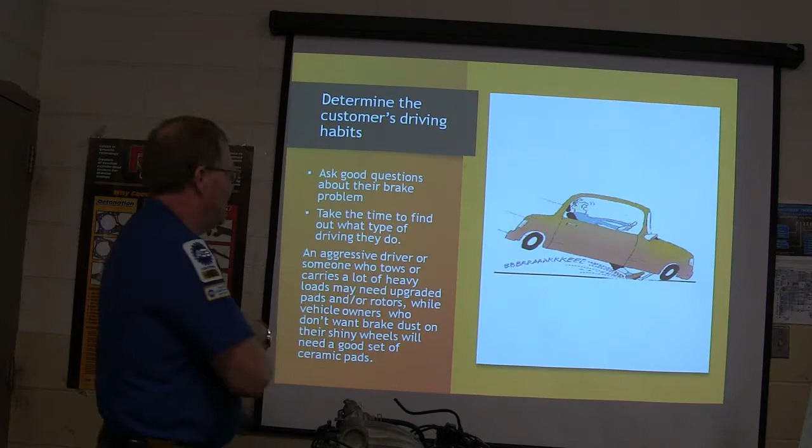All right, so the first thing we're gonna do when we're starting on brakes is we gotta determine what the customer's driving habits are, right? So basically, we're gonna take time to find out what kind of driving they do. If somebody's really an aggressive driver, if they tow heavy stuff, or if they haul heavy stuff, they're gonna basically need a higher quality brake pad and rotor.

You know the rotors that we were putting on the other day that were really nice and vented, and more higher quality than regular rotors? You're basically wanting stuff that runs cooler for the most part. If somebody doesn't want brake dust on their shiny wheels, they may want a really nice set of ceramic brake pads. You know what I mean? So that's the deal on that.

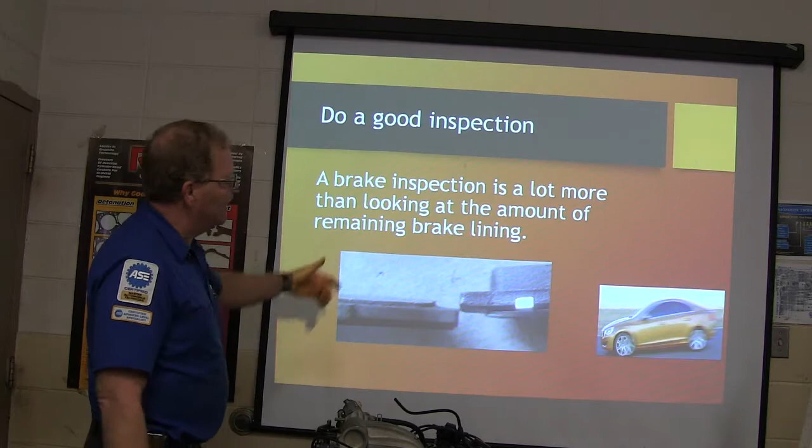All right, so brake inspection is a lot more than looking at the amount of brake lining. A lot of times we feel like if we've looked with our flashlight, oh, the brakes look okay. There's more to it than that. And so we're gonna do a good inspection, unless the brakes are totally shot and they're grinding the rotors away. Sometimes when it comes in, they're just gone, and that's basically what you're going after. May not be all that needs fixing on it, but that's what you're going after.

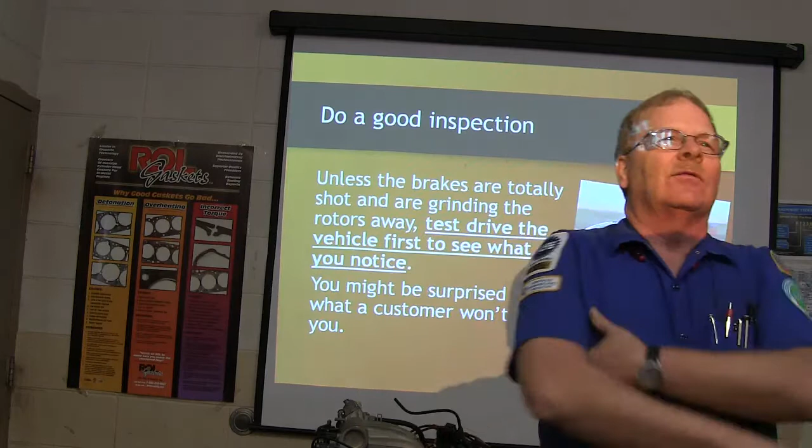But for example, Gene is talking about his truck, he says he's feeling it on his rotors, and he's basically getting his rotors machined in the next couple, 3 days. For example, my son was working out there with Mike, and they had this Jeep that came in that had 4-wheel disc brakes on it, and they machined the rotors because of brake pulsation.

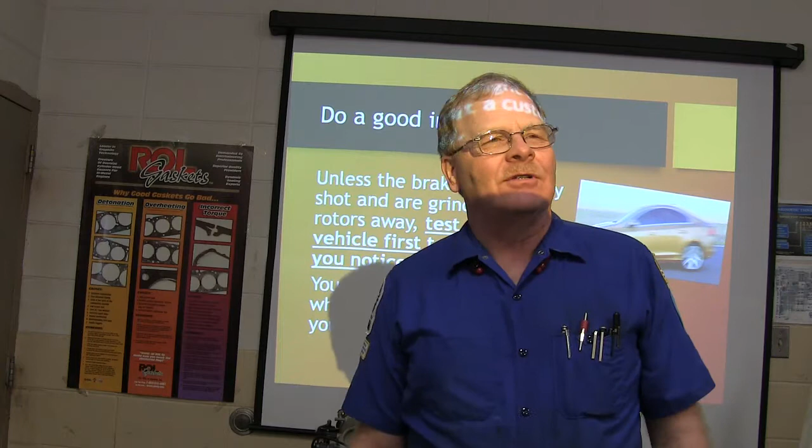And Matt drove it again after they machined the rotors and put them back on there. He goes, this thing's still pulsating just like it was. Mike looks at the clock and says, yeah, she'll be here in about 45 minutes, and here we are with our pants down around our ankles, you know. Well, they had to pull the rear rotors off and machine them. You kind of get to where you can feel the difference between the rear brakes pulsating and the front brakes pulsating.

Now, if you're driving one that's got drum brakes on the rear, you can actually apply the park brake gently, release the park brake and apply the park brake, and see if you're feeling it on the rear, and that way you'll know if you got drum issues. Now, you can't do that on the ones where the park brake's in the hat, or if it's done a different way.

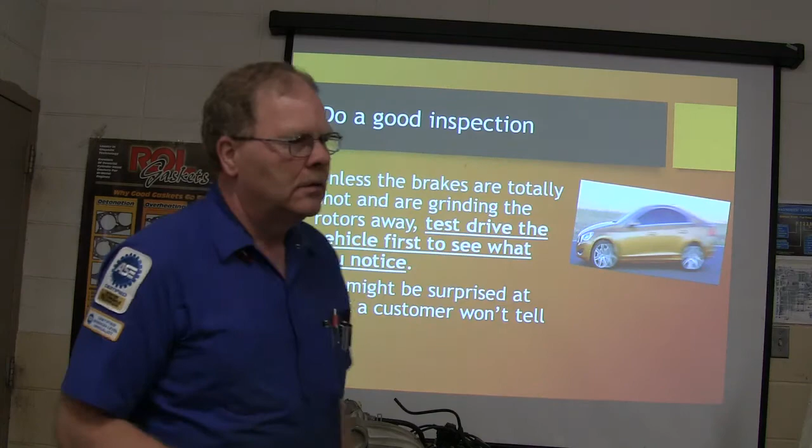Do you do that here? What's that? Shave the rotors down or whatever? Yeah, we do that. We machine rotors and all, we got all the machinery for that.

So, you might be surprised what a customer won't tell you. A lot of times they'll just throw you the keys and say, fix my car. They won't give you the least amount of information. Now, does the park brake work? That's something we want to know about. Sometimes they'll have rusted cables, sometimes they're maladjusted, sometimes there's something else.

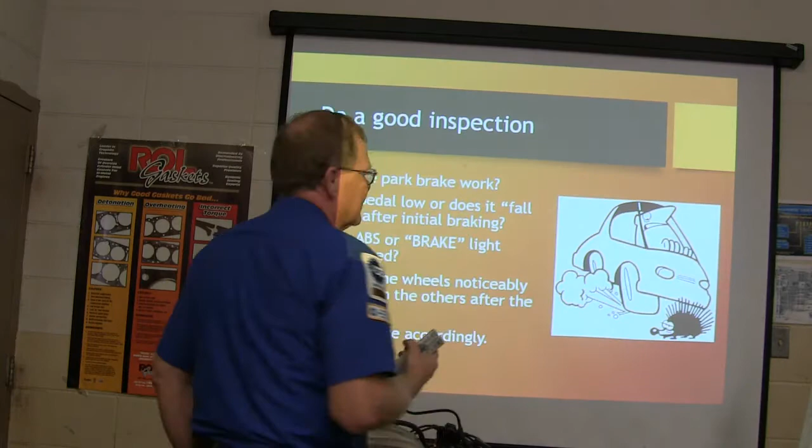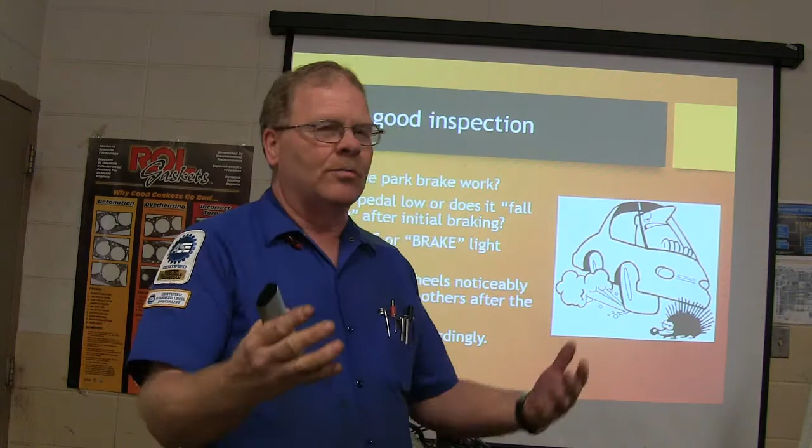And a lot of times on these Chevy pickup trucks that have those park brakes in the hat, not only are you going to put disc pads and rotors on the rear, but you're going to change the park brakes back there too. When you pull the rotor off, you'll see them. They're in the hat of the rotor. And we change those a lot of times because they're usually worn out.

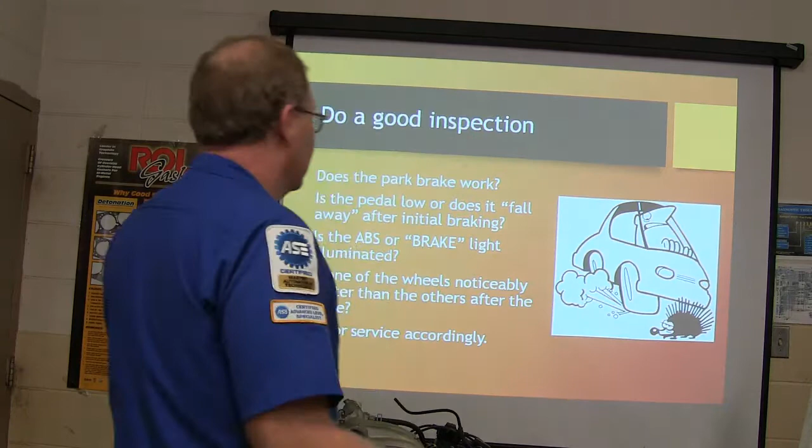Is the ABS or red brake light illuminated? Something else you need to pay attention to. Don't just assume that whenever you get your work done that all this is going to go away. You need to be thinking about it and keep it in mind while you're working on it. Is one of the wheels noticeably hotter than the other ones after a test drive?

Occasionally, have you ever had that? You're going to see it where one wheel is really, really hot and the brakes aren't feeling right. What was it on yours? It was on an F-250, and the other wheel that it was connected to, one was pushing harder than the other one. Yeah, you basically have caliper issues is what it amounts to. Tailor your service accordingly. All right.

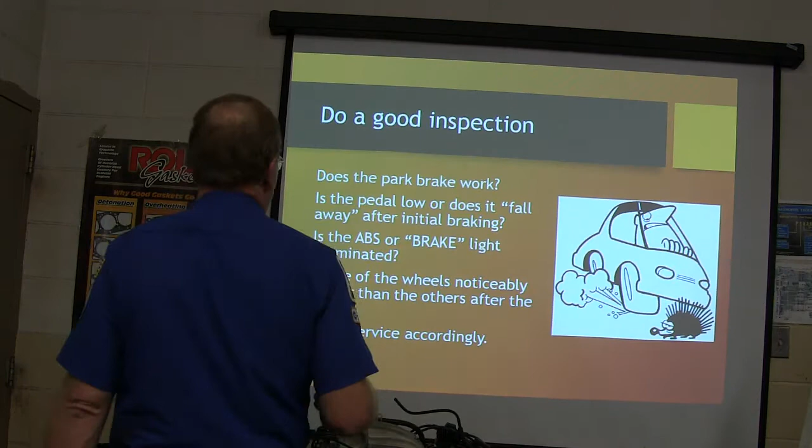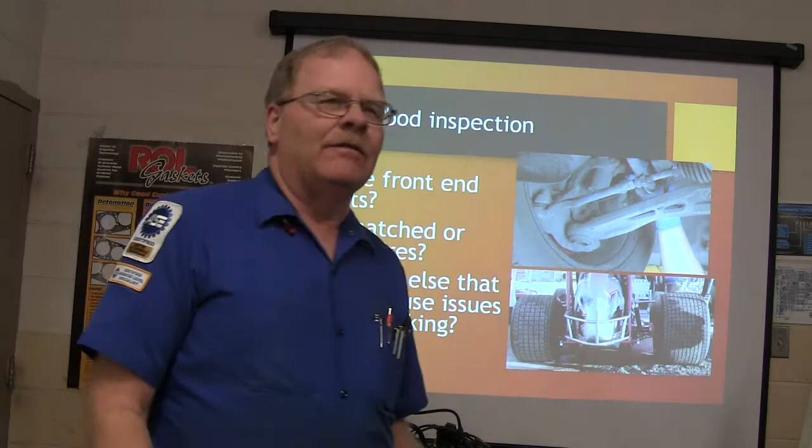So if you've got loose front end parts, mismatched or worn tires, anything else that might cause a braking issue. If you've got two different size tires, one tire that's low on air, this kind of thing, or if you've got strange wear on there. Now look at the brakes on all 4 wheels. Notice the brake lines. Are they badly rusted, or are they routed through deep wet mud inside the frame rails?

You know, those Volkswagen Rabbits used to have the brake lines running under the carpet, and there was a recall on those things. When I was at a Volkswagen dealership back in 1983, we'd have to pull the carpet back and see if those things were rusty enough to where they needed to be replaced. Because they were concerned about it, and I actually had one of those that the brake line ruptured on because of going under the carpet.

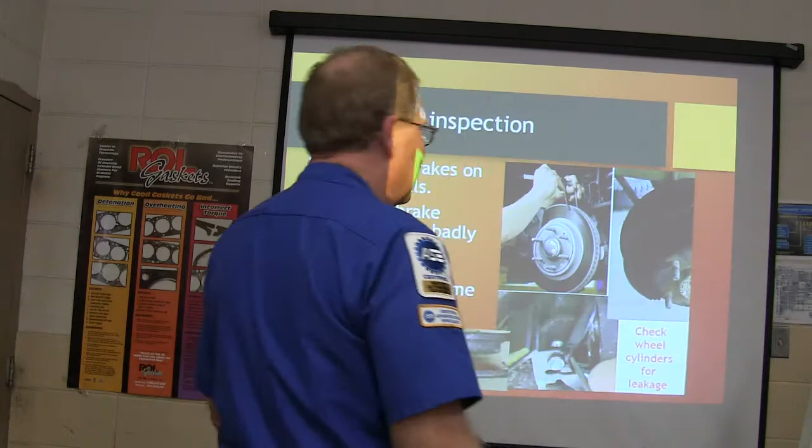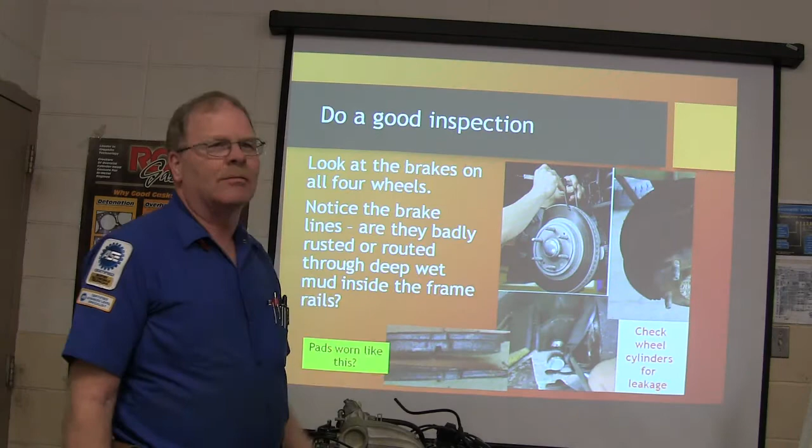All of a sudden you hear something and your carpet's getting wet with brake fluid and you can't stop, and you gotta be like a gunslinger on that park brake. Slide the wheel. Especially if there's a big truck coming and you're about to go out in front of it. Check your wheel cylinders to make sure that they're not leaking. If your pads are worn like that, that's a clue that there may be something more to it than just slamming a set of pads on it.

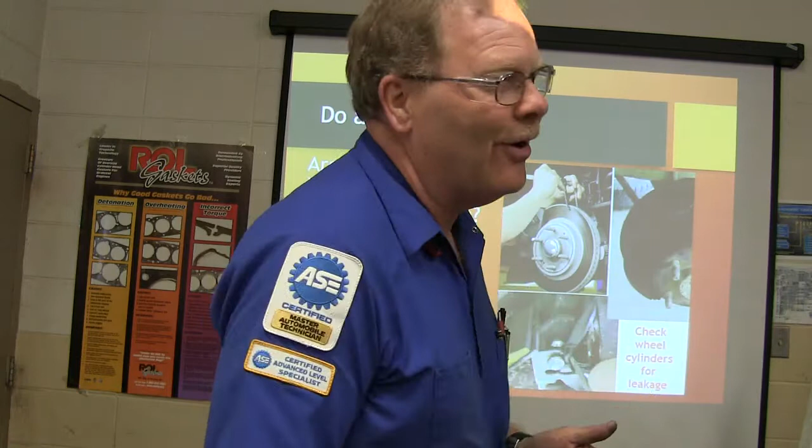How many of you guys have slammed a set of pads on there without even machining the rotors or replacing the rotors? Just throw pads at it. You know what I mean? That's not a mechanic's way of doing that unless he may be working on his own car. There's a right way to do stuff, there's a wrong way to do it. Are the rubber brake hoses leaking or swollen? Is it low on fluid? And are there leaks you can see anywhere?

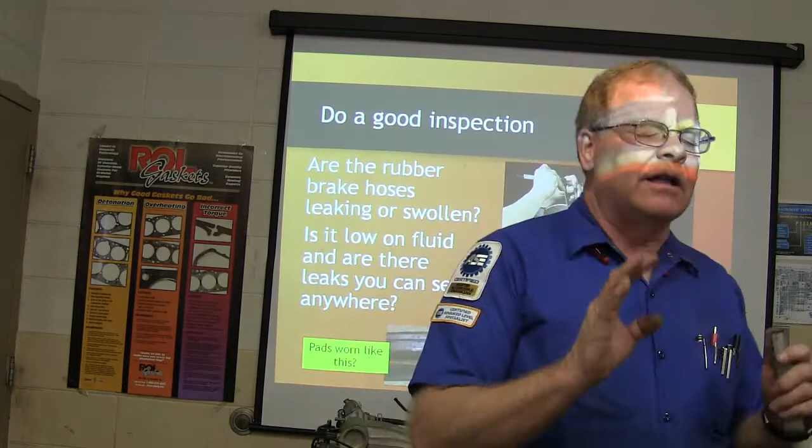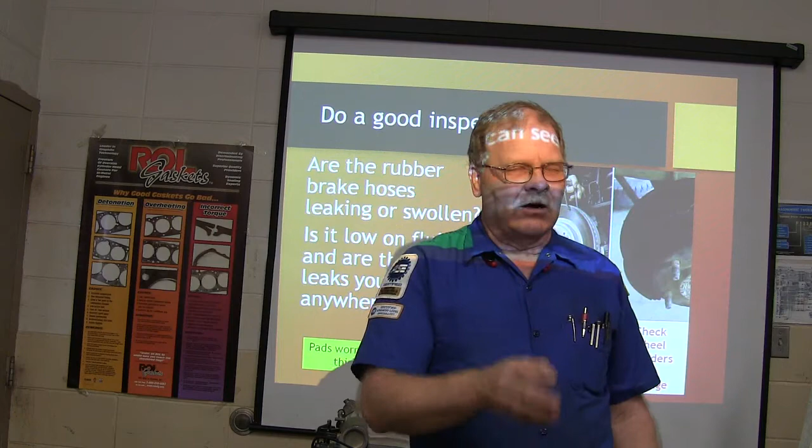Now I'm going to give you a little qualification here. Even if there's nothing wrong with the master cylinder, you may see a little bit of leakage down on the booster, right where the master cylinder goes to the booster. Not a lot. I'm not talking about a whole bunch. Something else that can happen is brake fluid can go inside the booster. We'll talk about that another time.

All right, so some people will look at the rotors. I've seen some people rub their finger across the rotor and act like that's telling them what needs doing to the brakes. Well, you can't really tell what's going on just feeling the rotors without looking at the pad lining and other things, because there's sand and rocks and all kinds of stuff that gets picked up and trapped between the rotor and the brake pad, and it's not going to be a beautiful, smooth thing all the time. That's just all there is to it.

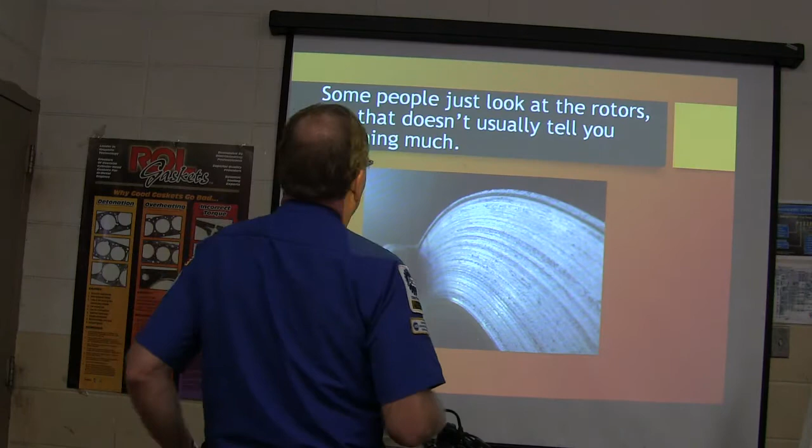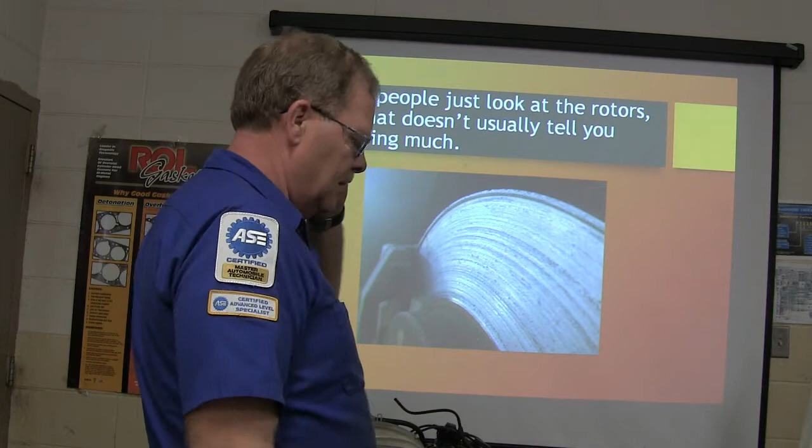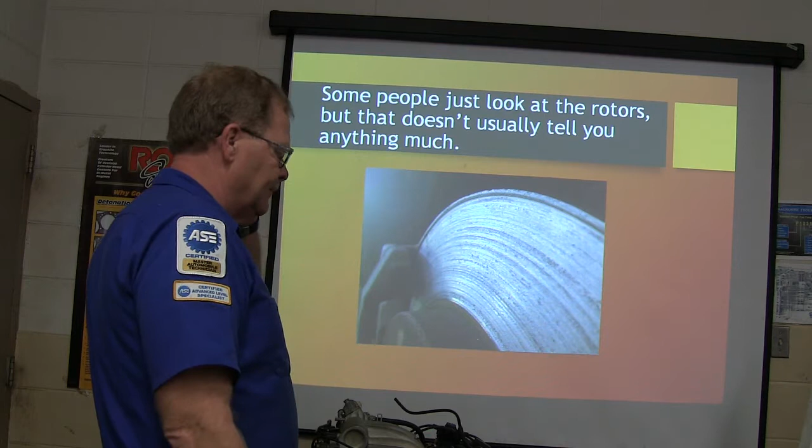I told you that phone was going to ring. Anytime I'm doing this, it's going to ring. This is Richard. Yes, ma'am? Yeah. Uh-huh. Well, come see me and I'll help you out. Thank you, ma'am. She'll be knocking on the door in a minute. She's got a screw missing out of the manifold in a Crown Victoria, okay? Whoever that is, I don't know. Did you leave the screw out of the manifold? No, I don't think we worked on this one.

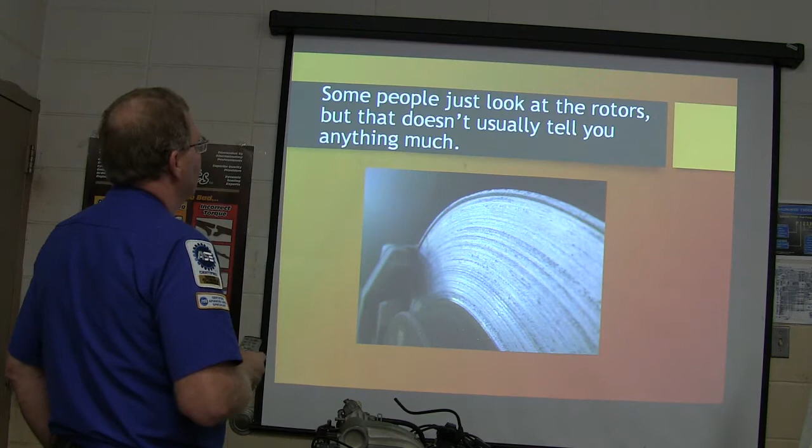All right, so, some people just look at the rotor, there we go. Come on, there we go. Do a good inspection. Watch this video. Let's see if I can make this video play.

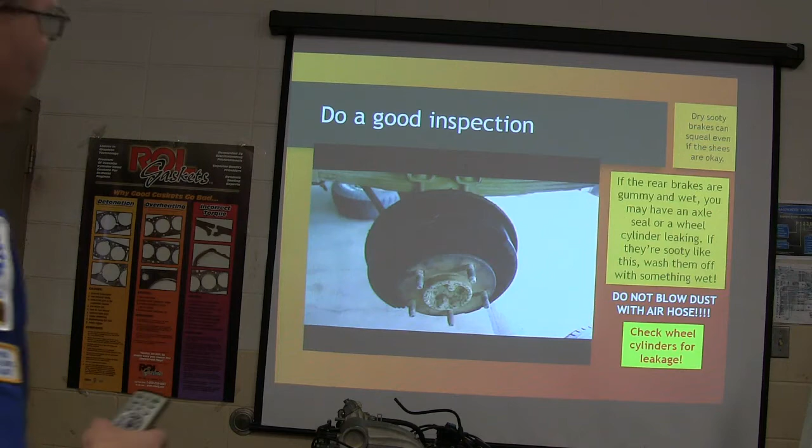Now, well, no, I'm not thinking, well, is this a video or is it not a video? I got a video, I may have just a picture here in a minute.

If the rear brakes are gummy and wet, you might have an axle seal or a wheel cylinder leaking, okay? If they're sooty like this, wash them off with something wet. Don't blow the dust with an air hose. It's bad. It's bad news. Check wheel cylinders for leakage always. Now, I'll show you in a minute how you do that.

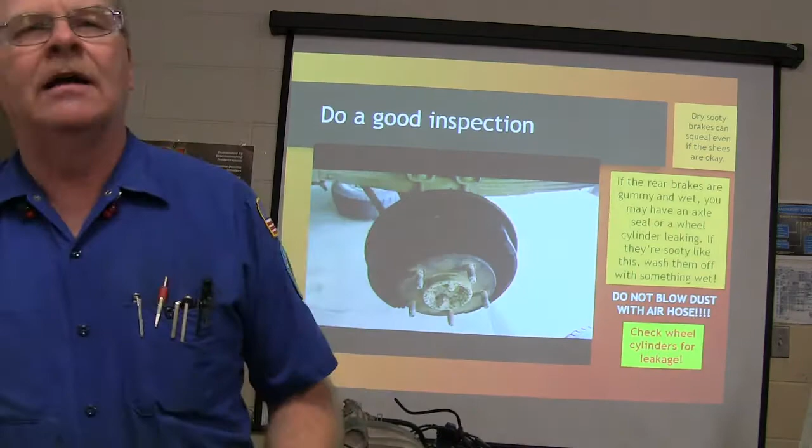Dry sooty brakes can squeal even if the shoes are okay. Now, if somebody's talking about the rear brake squealing and there's dust in the drums, then you may need to wash it out with some brake parts cleaner, 409, water, anything you can do that's wet that keeps that dust from flying up and going up your nose. That's basically what you're after.

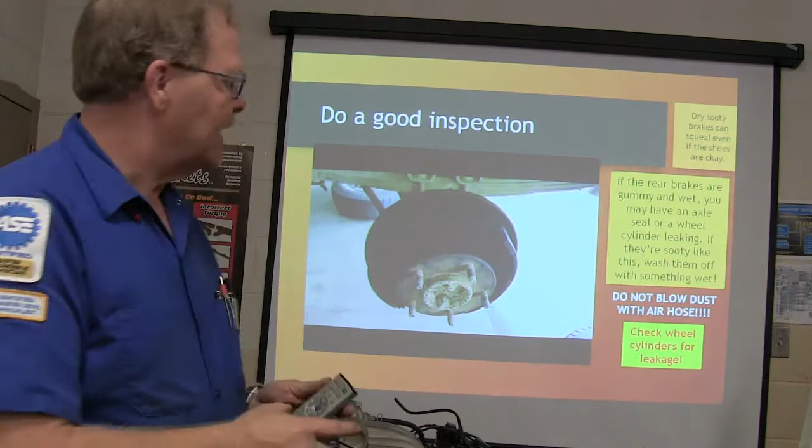Let's see what happens here. Right, now, what I wanted to show you on there, that video didn't play because I went from one computer to a different one. Sometimes that happens.

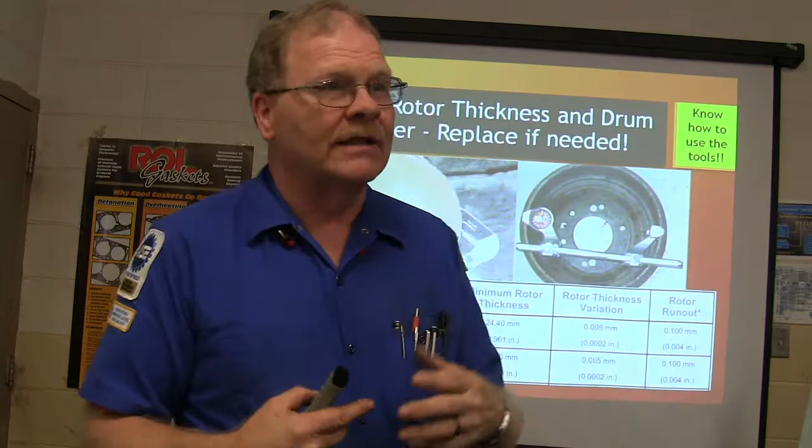Take that little boot. You know where your wheel cylinder is? Pull that little boot back and see if there's fluid in there. If there's fluid in there, you're going to need to redo those wheel cylinders. Got it? Or replace them. We used to do them all the time. I mean, we would actually rebuild a wheel cylinder.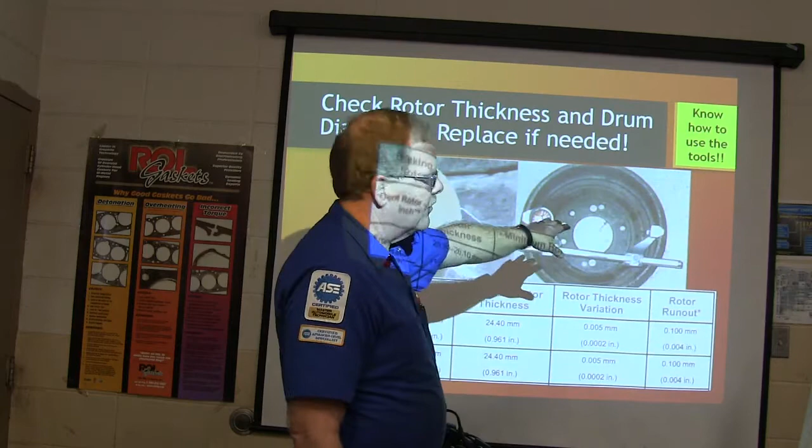Check the rotor thickness and the drum diameter, replace if needed. Know how to use the tools. If you can't read the tools, then you're handicapped. You need to know how to read a mic. You need to know how to read a drum micrometer. If you don't know how to do all that, there will be a final exam at the end, and you're going to have to do some of this stuff.

If you have not been here all the time, or missed those worksheets, or didn't turn them in, or didn't take it seriously, like I've seen all these people do all the time, they drift over here and I'll say, hey, what are you doing? Oh, I'm helping him. And then whenever I turn around, they go back to standing around shooting the bull, just watching somebody work. Well, they ain't really learning nothing, you know what I mean? Anyway, you got to make sure that you know how to do all this stuff.

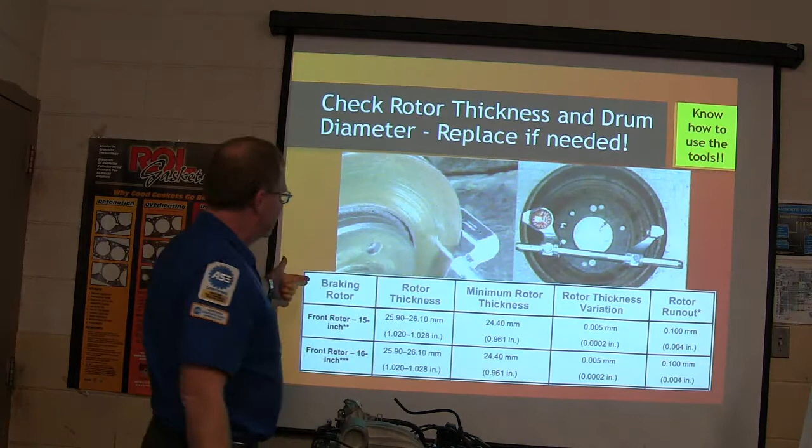This is where you're looking up and you see what your minimum rotor thickness variation means. If it's thicker and thinner, you got to measure like 8 different places with your micrometer, and your rotor runout is basically how much of this you're gonna have, right? That's that little runout that they're talking about there.

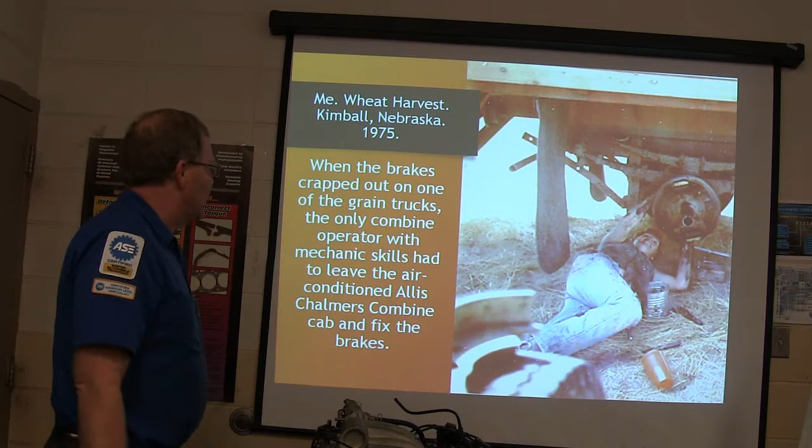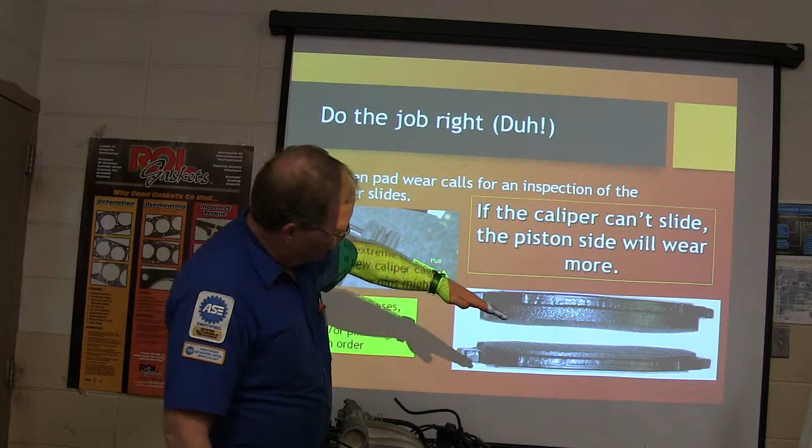All right, now, do the job right. Uneven pad wear calls for an inspection of the caliper slides. If you've got some that are either worn crooked like a wedge, or if the one next to the piston is worn more than the one on the other side, it means the caliper's not sliding like it should. And that's when you're supposed to do these.

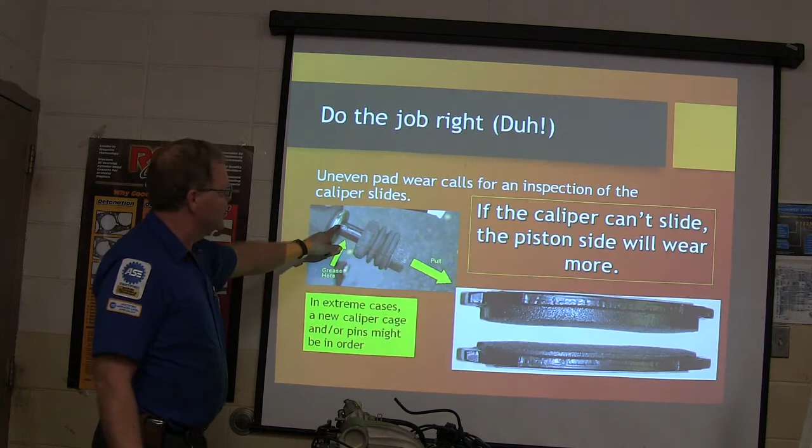Now you can get these little kits that will come with that boot. If that boot's busted, chances are this is gonna have a bunch of water up in it, it's gonna be stuck, and you're gonna have to fix that. And in some cases, you may have to replace the caliper cage. But the caliper cage doesn't always come with the dadgum slides. You got me?

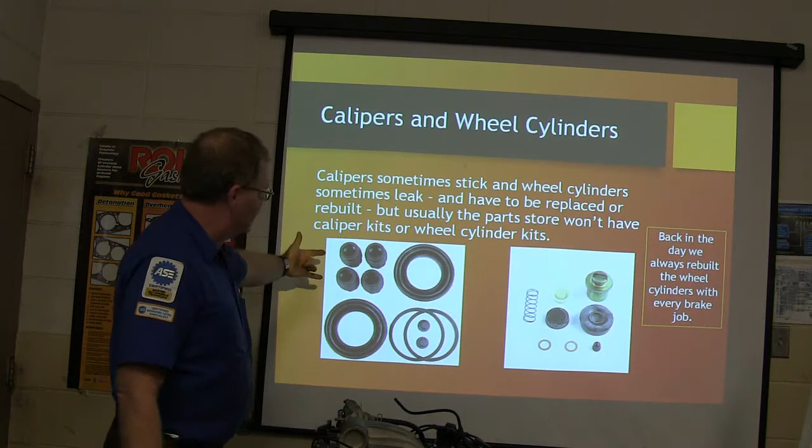Now then, calipers and wheel cylinders, you can do the kit. We always rebuilt the wheel cylinders on our brake job back in the 70s, okay? So the caliper kit a lot of times will come with these little boots here, and they'll come with those seals. There is a caliper out there that everybody's supposed to tear apart and put back together.

I think you've already done that, haven't you? Didn't you and Elijah do that? But, I done so much stuff. Yeah, I've been dumping it all on you, haven't I?

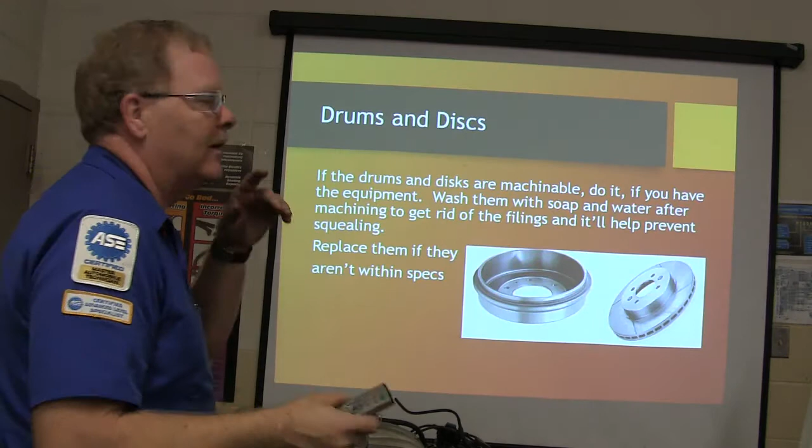If the drums and discs are machinable, do it if you have the equipment. If they're not machinable, then you need to replace them.

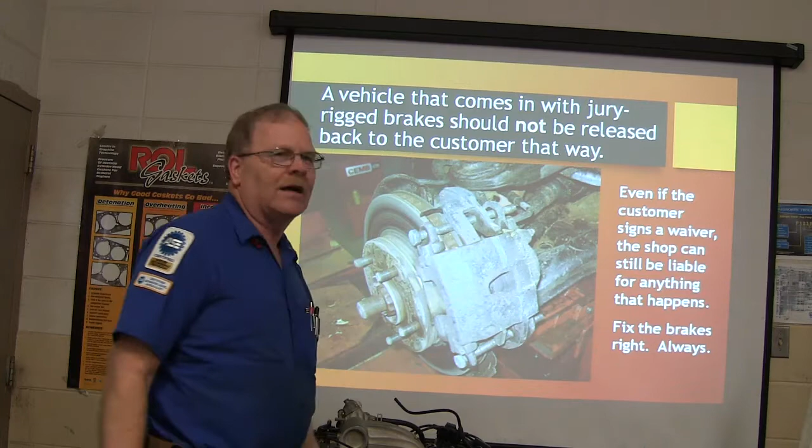If one comes in here all haywired up and barely holding together and you let it out of there like that, then you're basically now the last person that had it apart, and if it crashes, it's on the shop or you. You got me? It's better to disable the vehicle and make them come get it with a wrecker than it is to put it back together with the brakes not working right. You know what I mean? That's just all there is to it.

And a lot of times they say, well, I don't want you working on my truck if you're wanting to put all that stuff on there. You put it back together and I'll drive it out of there. No, you won't either. I'll put it back together and I'll fix it where somebody's got to come get it. Even if you have to pull the fuel pump relay or something. Fix it where they can't drive it if it's got stupid looking stuff like that. Always fix the brakes right. So you can refuse to do that? Yeah, they tell you can.

If the car is in your shop... there was this one I heard about a long time ago, a little old lady came in there. She didn't want them to fix her brakes because she didn't like the price, and they said your brakes are dangerous, you're liable to crash. And she says, well, I don't care, I'm not letting y'all fix the brakes. And so they made her sign a waiver. She drove away and she crashed and she sued the shop. You see where I'm going with that? So you don't go there.

How can she sue him if she signed a waiver? Because she signs the waiver and the judge says it doesn't matter if she signed a waiver. You knew that car wasn't safe and you let her take it. That's how that works. You see what I'm saying? I told her this, she said she didn't want to do it, so that's her fault. Well, then he says, doesn't matter. You owe her $2,500. Pay her up right now or go to jail. I ain't kidding you.

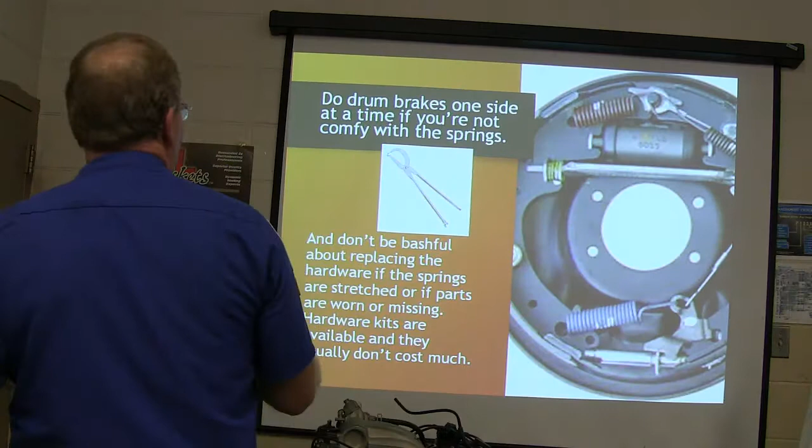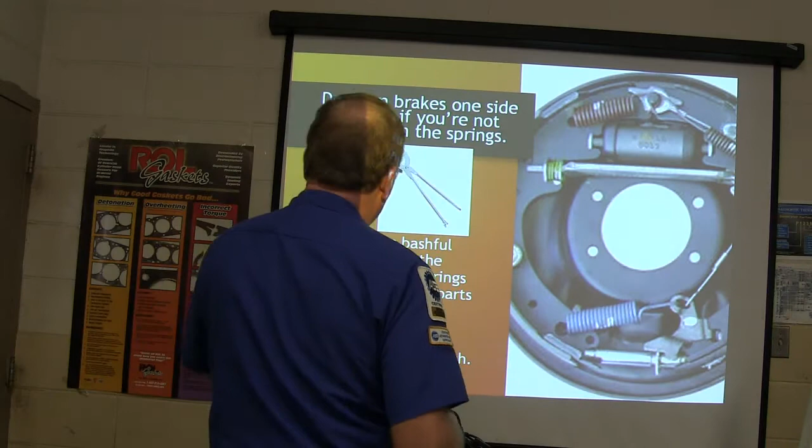Do drum brakes one side at a time if you're not comfy with the springs. Okay? Don't be bashful about replacing the hardware if the springs are stretched or parts are worn or missing. Sometimes you'll take brakes apart, and some yo-yo did the brakes and didn't know how to put some part back on there, and he just throws it aside and puts it back together without it. See what I'm saying? That's what happens sometimes. Or if everything is super rusty and the springs are weak, just get a hardware kit and build it up right. That's a good way to do it.

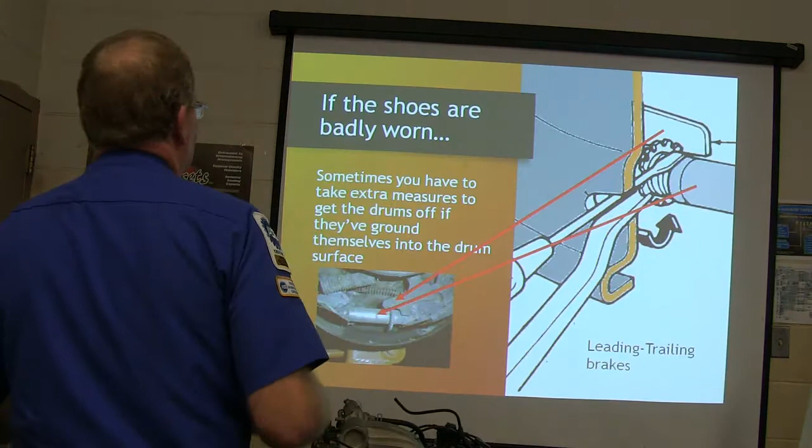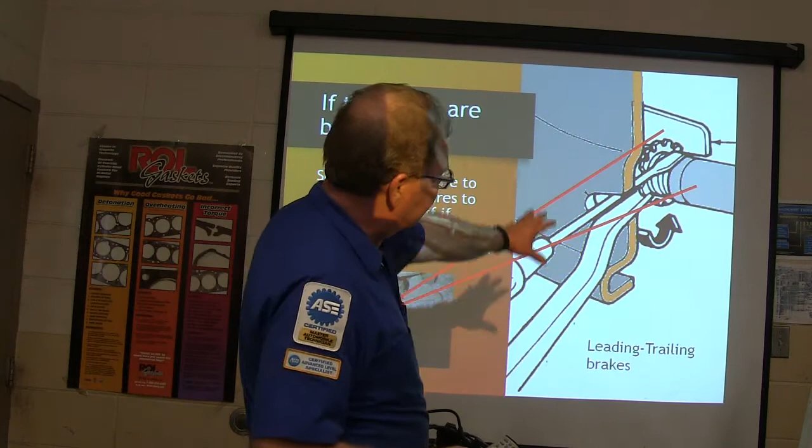Now, if the shoes are really badly worn, sometimes they'll be dug into the drum and you can't get the drum off. So you've got to figure out, well, this one right here is just conventional leading trailing brakes. You've got to get your screwdriver, push in there, push that adjuster away from that wheel, use your brake spoon, and loosen the drums. Don't get confused about which way it goes, or you're going to make them tighter than they already were. But anyway, that's something you're going to have to deal with.

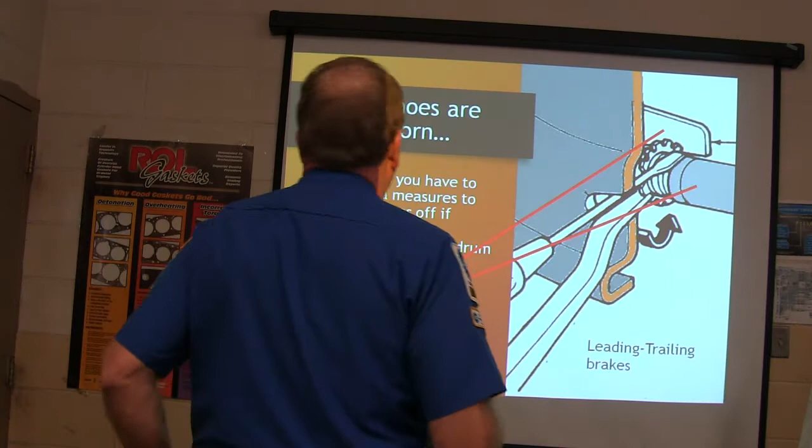This rusty nonsense you're having to deal with out there, man, that's life. That vehicle's not that old, but somebody had it at Panama City Beach and it's all rusted up in the back. We've got all kinds of hard work we're going to do on this thing. Adjust the drum brakes correctly for a good pedal.

Now, what I mean by that is you want the brake shoes to be really close to the drum so when the first time you hit the brake, you got a good tight pedal and it's on the top. If the brake shoes are adjusted in too far, you'll hit it once and it'll go down that far, and you hit it again, it's up on the top, you'll almost think you got air in your brakes. But you gotta have those adjusted right. If they're not adjusted right and you know they're not adjusted right, you jack that thing back up and you fix that. Because basically you're gonna have to have it where it's gonna stop right the first time you hit the brake. First time you hit the brake.

Hey, outstanding performance, I appreciate it.

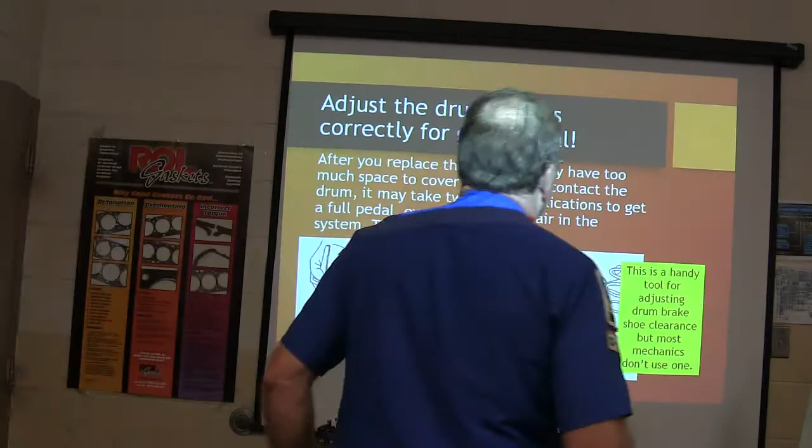All right. This is a handy tool for adjusting drum brake shoe clearance. You check it here, you check it there. I don't know anybody that uses one of those. You know, you may see that on an ASE test. What's this mechanic doing? You know, they'll have a picture like that.

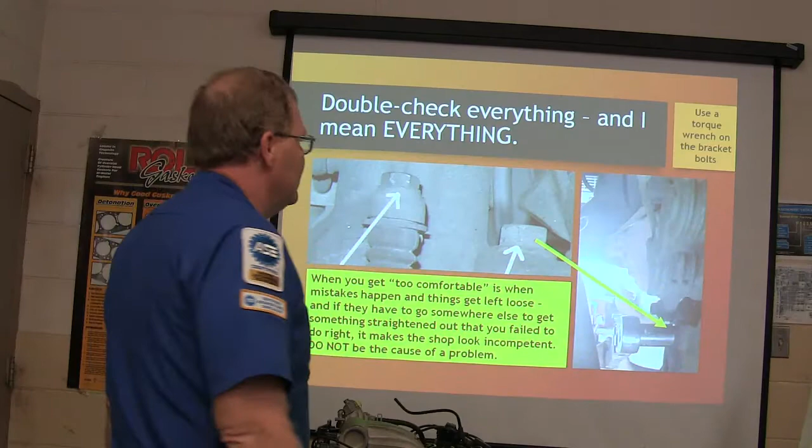All right, double check everything, and I mean everything. When you get too comfortable, that's when you start leaving stuff loose. And when you leave stuff loose, there's issues that take place. Now, this homeboy right here, he's actually using a torque wrench to tighten the caliper cage bolts. 118 foot-pounds. On that particular truck, it was 118 foot-pounds for the caliper cage bolts.

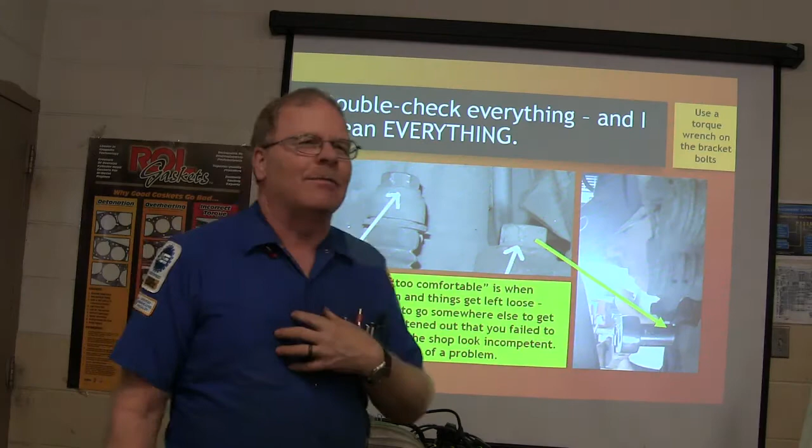Yeah, that was him. All right, so if they go somewhere else to get something straightened out, and they may have to if they're in another town, it's going to make you look silly if they say, well, they left this loose, they left that loose, they didn't put that back together right, they put the calipers on the wrong side, so on and so forth, right?

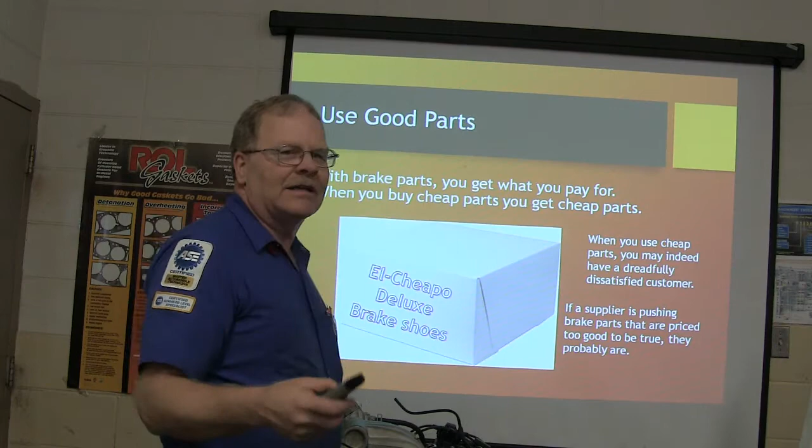All right, with brake parts, you get what you pay for. When you buy cheap parts, you get cheap parts, right? I don't know if you've seen this brand or not, but if you have, stay away from it. Don't emulate the El Cheapo deluxe. When you use cheap parts, you're gonna be asking for trouble, all right? It says it for you.

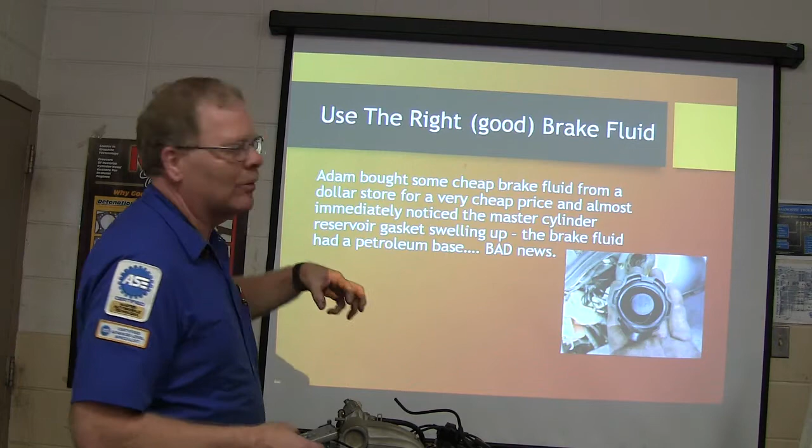Huh? Cheapo. Yep. Adam bought some cheap brake fluid from a dollar store for a really cheap price, and almost immediately when he poured it in there, the next time he looked, he noticed the master cylinder reservoir gasket was swelled up because it was cheap brake fluid from a dollar store that was petroleum based, which is not good for any of the rubber things.

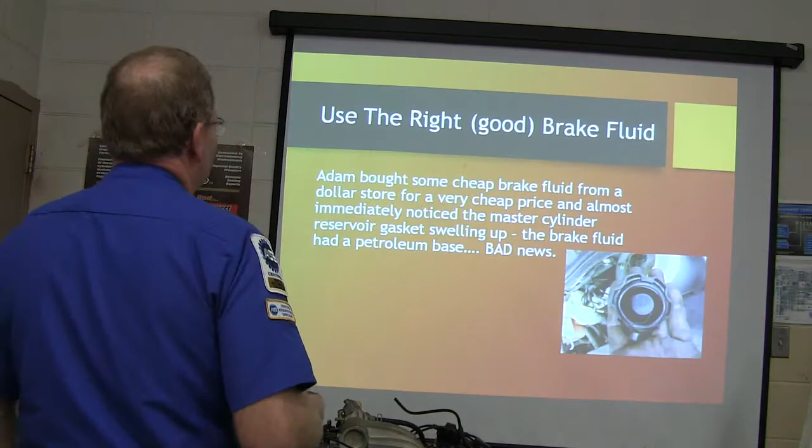All right, bad news. All right, so the banjo fitting on the caliper requires two washers. A washer on one side, a washer on the other side. You only put one washer on there, it's gonna leak. All right, the banjo fitting bolt is very hollow and easy to break. And if you break it by over torquing, the parts store probably won't have one in stock, and you may have the car down for a couple of days waiting for a banjo bolt.

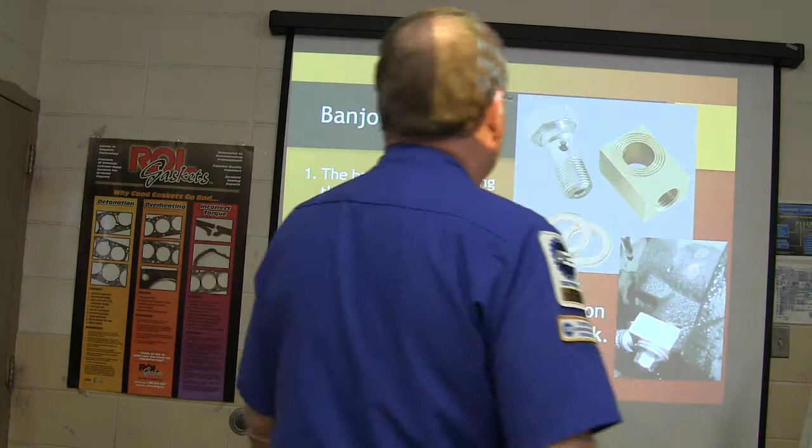And don't get the smart aleck idea you're going to take a drill press and make you a banjo bolt. You need one just like what it's supposed to have on there. Pay attention and think about what you're doing. Bleeder screws, the rubber cap on the bleeder screw is there for a reason. It's supposed to keep dirt out of there.

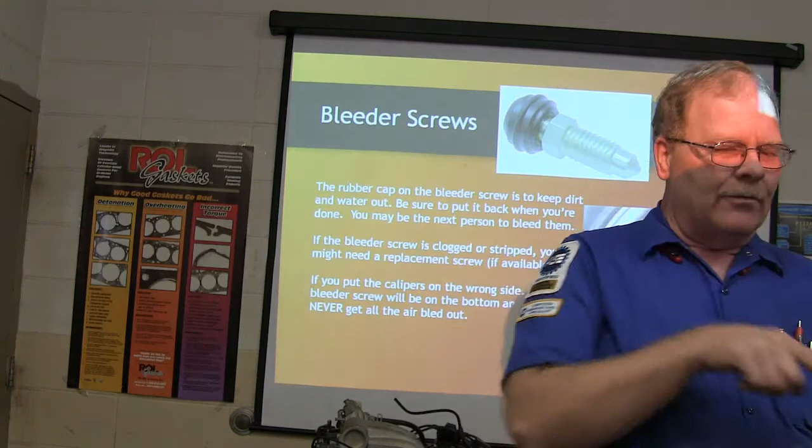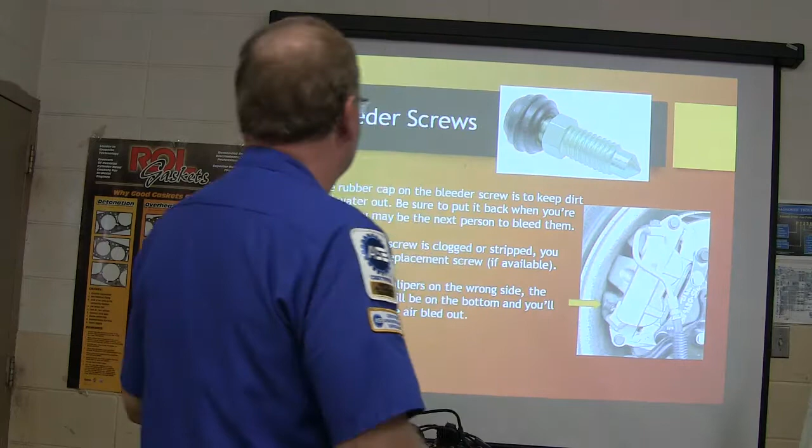I don't know the times I've had to take a bleeder screw out and run a drill bit in it to get the dirt and crud out of it and blow it out before I could even bleed the brakes. Make sure you put it back when you're done. You may be the next person to bleed the brakes, and you may make trouble for yourself if you do something wrong like that. If the bleeder screw is clogged or stripped, you might need a replacement screw, or if the work's bad enough, you may need a wheel cylinder or a caliper, the total thing.

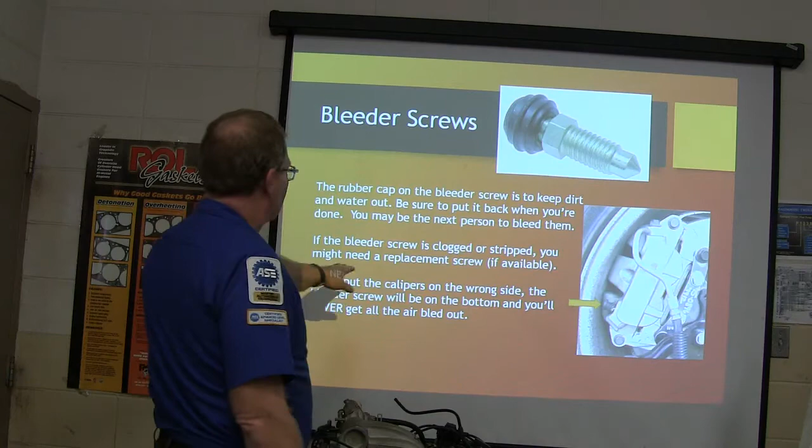If you put the calipers on the wrong side, the bleeder screw will be on the bottom, and you will not ever get all the air out of that sucker. So make sure that you put it on so that the caliper, see that bleed screw, they put that on there backwards, and it's up at the top.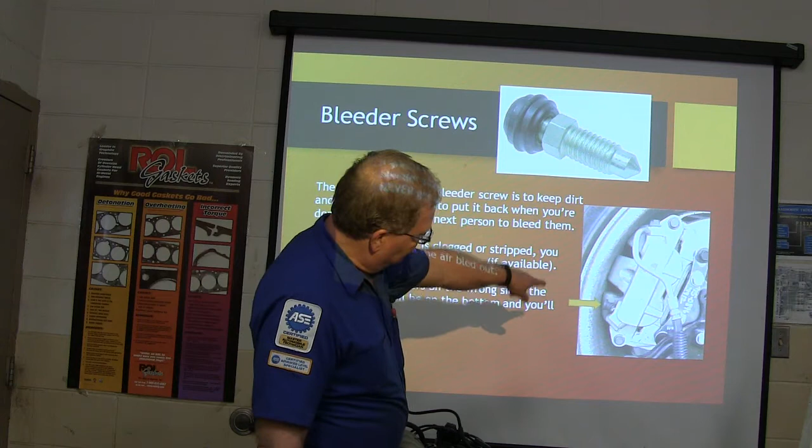When you're putting the caliper back on there, make sure you haven't twisted the hose. Because if you've twisted the hose, it's going to stretch it and probably destroy it the first time they turn the wheels the other way. Got me? So make sure that the hose is actually looped over there like it's supposed to be, because it's real easy to twist that caliper.

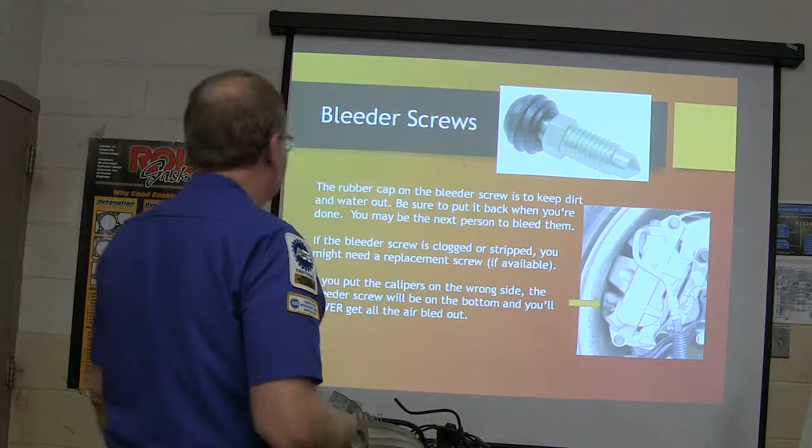When you take the caliper off, hang it on something, don't let it hang on the hose. It's a bad idea to let the caliper hang on the hose. It destroys it, right? Okay, now then, we're going to move over here. Keep the master cylinder full while bleeding the brakes, or you'll be starting over.

Here's a trick I came up with. It's like a chicken house waterer. You got to make sure this Coke bottle is, well, two things to begin with. If you're going to put something poison like brake fluid in a Coke bottle, make sure that nobody picks it up and drinks out of it. It's really a bad idea to put something like brake fluid in a Coke bottle.

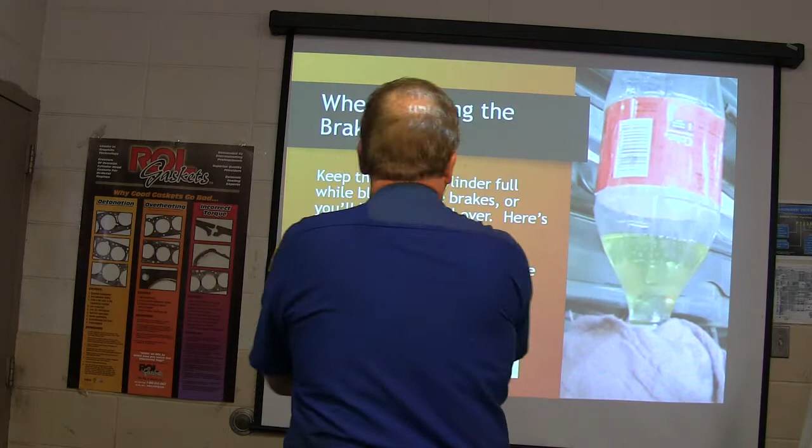Huh? You gotta label it. The wrong person see that, you get in trouble with that. Yeah. So basically what you need to do, or you can peel that label off, and you can basically put a skull and crossbones on it. That way they'll know they're not supposed to drink it, you know.

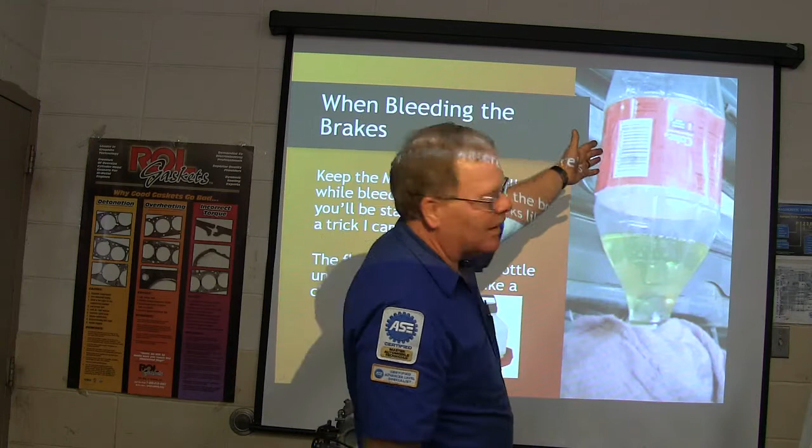But anyway, the point is, I take a plastic bottle of some kind, and I took this picture out in the shop, turn it upside down, let it stand in there, and it will feed brake fluid in there as it needs it while you're bleeding them. That keeps you from having to lower the truck and pour brake fluid and pour brake fluid. Furthermore, it acts like a sight glass, and you can see where you are.

You got bloop, bloop, bloop, like that. And if you're really smart, you'll put a hose on each one, open all the bleeders, and just pump the brakes till all the air is gone. Sometimes you can do it by yourself that way.

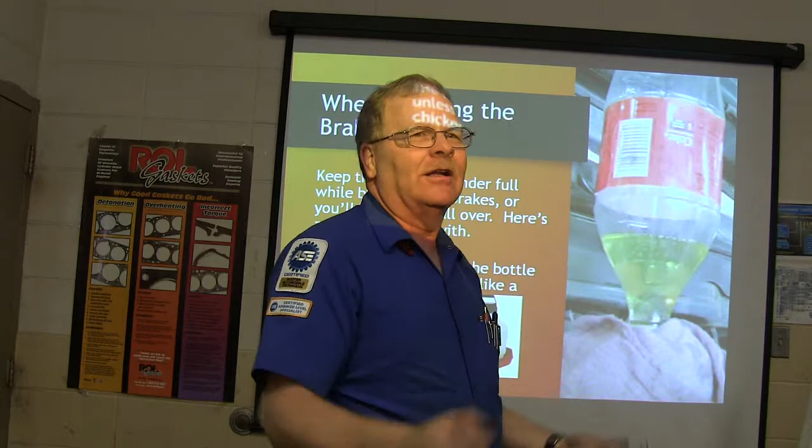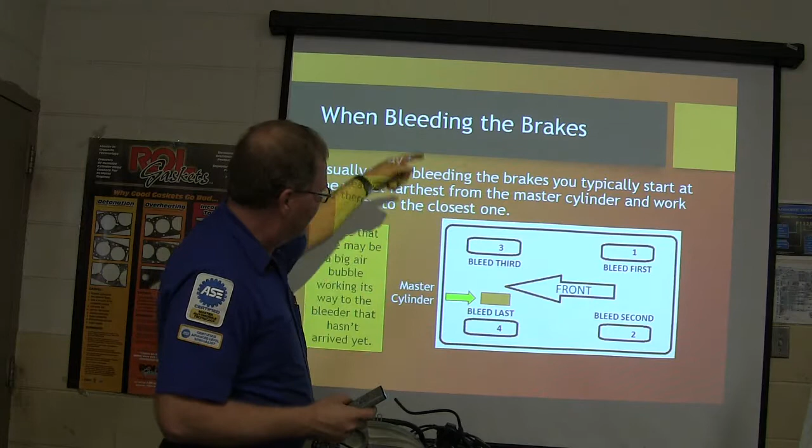All right, when bleeding the brakes, you gotta start at the wheel farthest from the master cylinder and work your way to the closest one, usually first, second, third, and fourth, and there'd be your master cylinder right there. There may be a big air bubble working its way to the bleeder that hasn't got there yet. Even if you're seeing straight fluid coming out, that doesn't mean there's not a big air bubble coming down the line, all right? However, make sure you know the right order the brakes should be bled in, and you may have to look it up.

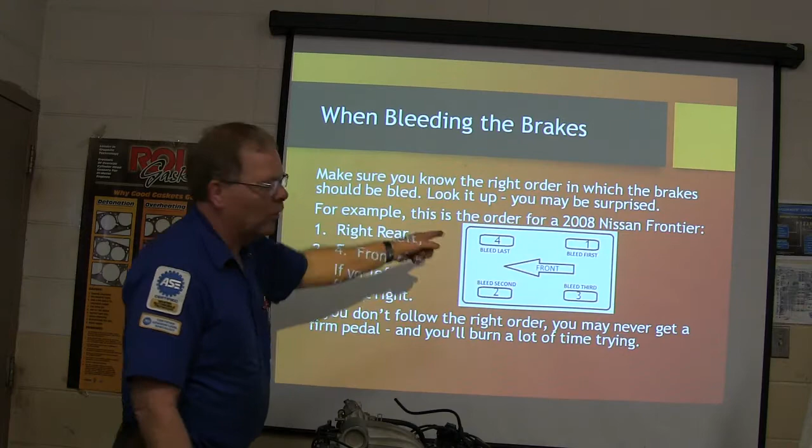Like for example, this is the order for a 2008 Nissan Frontier. Right rear, front left, front right. See how it is? 1, 2, 3, 4. That's not what you'd expect. If you bleed them the wrong way, you'll never get a hard pedal, all right? If you don't follow the right order, you may be working a long time.

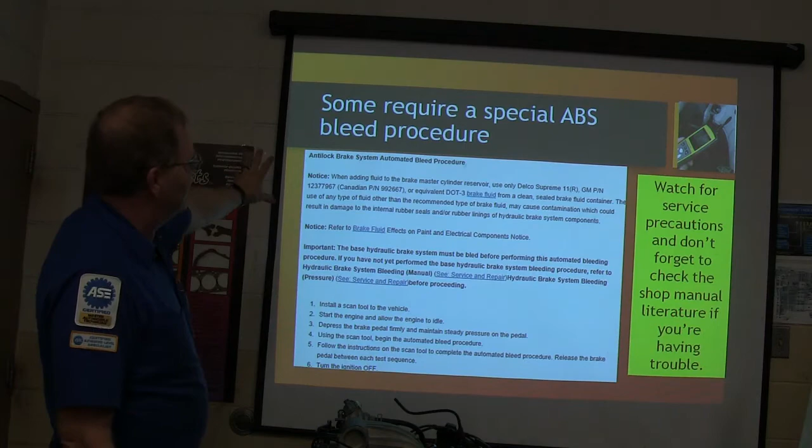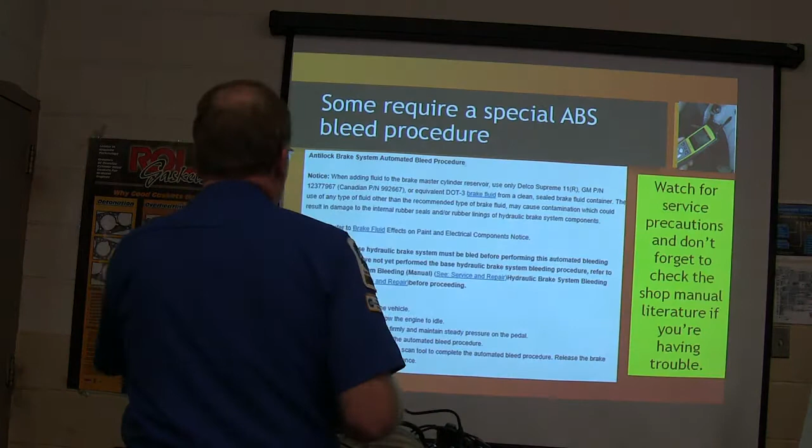Some require a special ABS bleed procedure. Watch for this in a service manual. Some of them you bleed normally, but before or after you bleed it normally, whatever they tell you, you hook your scan tool up and run the ABS pump to get the air out of it. See, that's really important. Now this one right here is a GM service procedure for that.

Now I have to pump the brake pedal, move the pads and the shoes into position. After you reinstall and torque everything, including the lug nuts, pump the brake pedal to make sure the pads and shoes are where they need to be. After you've double checked everything and double checked it again, make sure all your bolts are tight, make sure you haven't left nothing loose, make sure there's not something out and dangling and all that kind of stuff. Don't move the vehicle unless you do this first, all right?

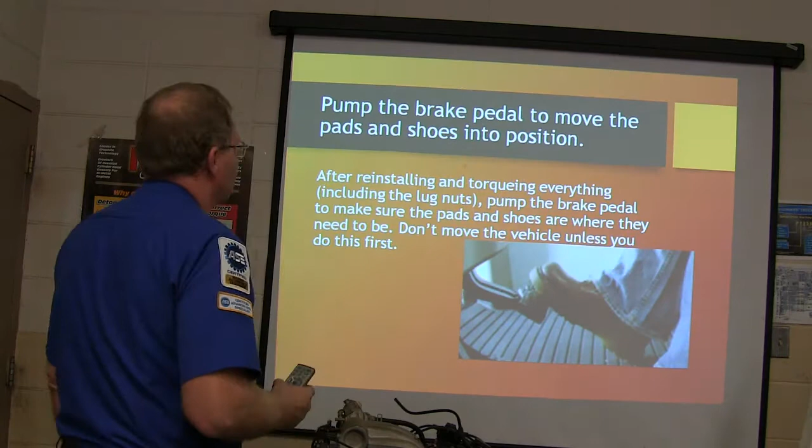Now, after you replace the pads, with new or machined rotors, Bendix recommends that you drive the vehicle and make 30 normal stops from 30 miles an hour with a 30-second cool down each time to burnish the brakes. Get them seated in, right? These are gentle stops, not abusive panic stops. You know, not driving somebody's Mustang up to 90 miles an hour and locking the wheels up and claiming you're burnishing the brakes.

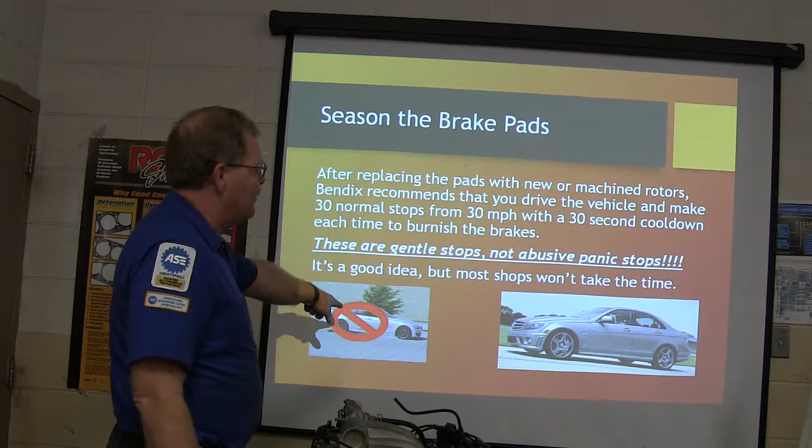You're gonna go 30, 30, 30, remember that. 30 miles an hour, normal stop, 30-second cool down. Takes about 15 minutes to do it. This is a slide panic stop, this is a normal stop. Right here, at least that's what the picture is supposed to represent. Take this seriously and know how to do the work right.